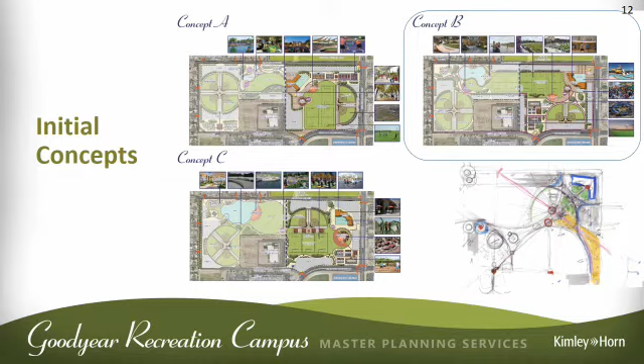From this concept development in Workshop 2 and the feedback we heard, Concept B started to rise up, but we also had other comments that helped us get to this final concept. As mentioned, the concentration is on the 40 acres on the east side. The west side, which is the remaining 46 acres, was very conceptual—we wanted to have ideas of how the interface could be with the current 40 acres.

Another element we're looking at is the half-street improvements. There will be half-street improvements along Harrison, along with a signal.

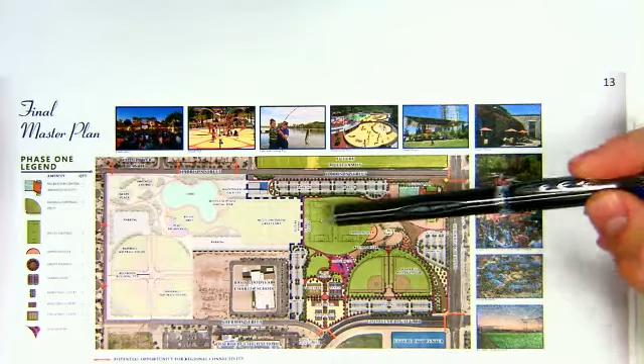Just want to quickly walk through some of those elements. We have the fields, which could be utilized as an event space as well. Again, one of the key aspects was trying to get multi-use out of the entire park as a whole. We have the recreation center building in orange. The blue is the aquatics facility. The multi-use plaza right here. The baseball fields, sport courts down here, the playground, and then a group ramada.

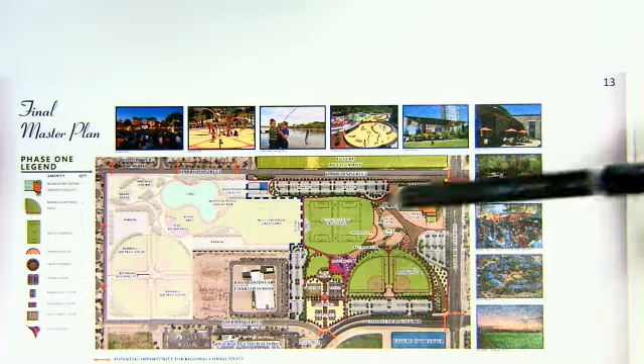One of the elements we heard about was distributed parking throughout, and then having an open park instead of having roads that do go through the park. So that was very key in terms of how we situated the parking.

When we looked at the multi-use plaza, one of the key elements was creating a space that could be very versatile to hold different events. We could have food trucks. We could have an art festival. We could have a farmers market. So we have an upper plaza that's near the building. We have a middle plaza, which is really that opportunity. We could have a drivable space that would serve as a fire lane as well. But that's where we could really have those food trucks come on in and have them accessible to the site.

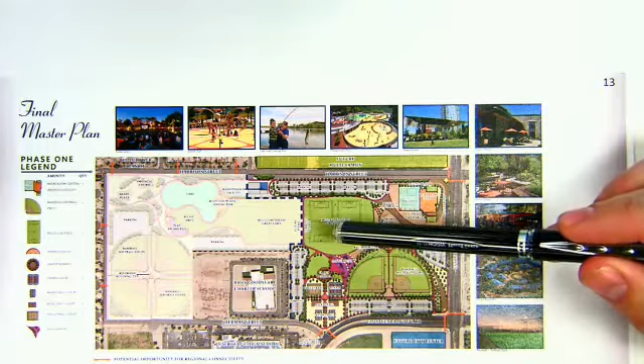And then we have this lower plaza, which really ties in with this orange half circle here, which is representing an amphitheater. Conventional amphitheaters don't get much use during the year, maybe 2-3 times for a large event. With this stage, the idea is to have the ability for larger performances that could hold folks on the event lawn, and then have intimate spaces, maybe music or performances for a smaller group in that multi-use plaza area as well.

So we'll definitely have different opportunities as we go through the site to play with the vertical, and we do look at opportunities to sink the fields to create more of an open upper area space, so you kind of have a crescendo. One of the elements as you come in from Goodyear and Estrella, as you come into this way, is the reveal. So we've looked at an art space that would be centrally located within the plaza area to kind of have all angles. When we did a charrette exercise, one of the key elements was trying to get line of sight from the building back to the park and throughout, so folks could have that exposure and have a new sense of discovery when they do come to this park each time.

I'm going to ask you to hold right now. This is a lot of information. Where he is at this part. Do you have any questions on that or on these, anything they showed? All right, good job then.

Go ahead. Where was the place where you could possibly have a music festival, that type of thing? Show me that again on here. So a larger event could be here. This would be the stage. That would be the stage, okay. Yep, and then this would be a larger venue for that.

Yeah, I thought what we had at the ballpark recently seemed to be pretty successful. We had about 5,000 people there. So with the whole idea, I like the gathering place approach. And with that approach, this would be perfect to draw people in for a variety of events throughout the whole park. So it's something that I think will get utilized, and you can come up with all kinds of creative ways to get them there. So again, I appreciate that part of it.

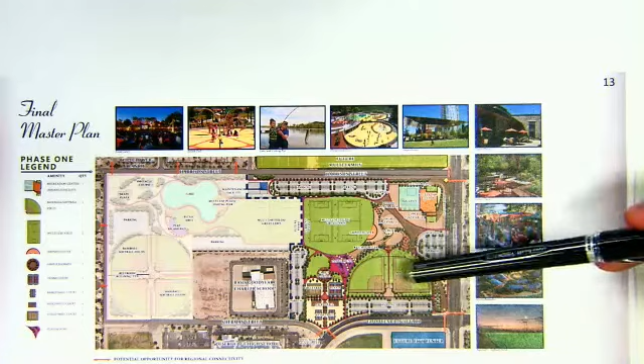So quickly, just to recap on some of those amenities: the 2 softball/baseball fields, 2 rectangular multi-purpose fields, the playground. We have 2 tennis courts, 2 sand volleyball courts, 6 pickleball courts, and 2 basketball courts.

Sure, back to the presentation.

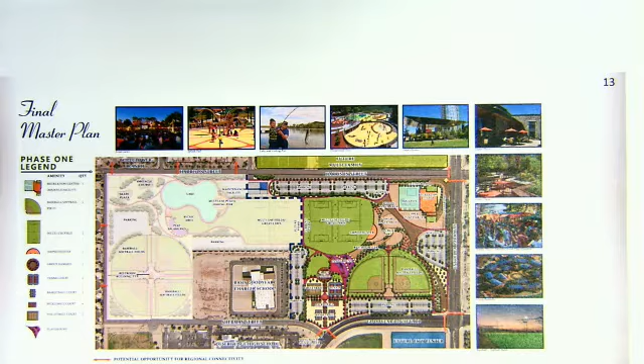So look at the recreation center. This was located at the northeast corner of Harrison and Estrella. This is a 30,000 square foot floor plan that we're looking at here. It includes a gym, multi-purpose gymnasium, multi-use classroom, multi-use rooms, 3 of those. It has the locker rooms.

As you come into the orange space, you can either go left, to the aquatics facility, or go right, into the recreation side, so the gym or the class multi-use rooms. The multi-use spaces would be versatile to allow for anything from bunko to maybe a Zumba class, a yoga, and then that larger multi-use space could be opened up to the activity lawn there, so it could have maybe a banquet, a covered patio space. The gymnasium would have roll-up doors, another activity space off to the north there to kind of spill out, have events there. As you move into the aquatics facility, you look at a competition pool, 8-lane, and then an activity pool, and then a lazy river and a slide.

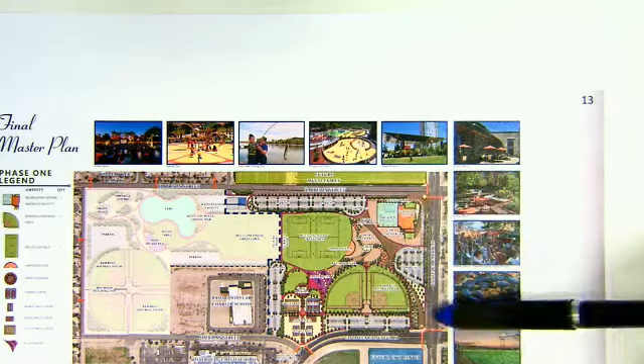So I was looking at the full thing here. Is there a path around the entire facility's new park? Can we switch to Elmo? Thank you. I see the access road and into the parking lot. So all the purple, that's a multi-use pathway that goes throughout, and it's one of the comments we had, that we certainly wanted to have that.

That could get you around and look at all the elements in the park, and then have a curvilinear element to it. What's the distance around the entire path? That's a great question, I can come back and get you that.

The only reason I asked is I was curious if one day we wanted to run a race, like a 5K fun race or something like that. It's probably about 4,000 to 5,000 linear feet of path throughout the whole park, kind of all around if you look at it. Okay, I'm just curious, thank you.

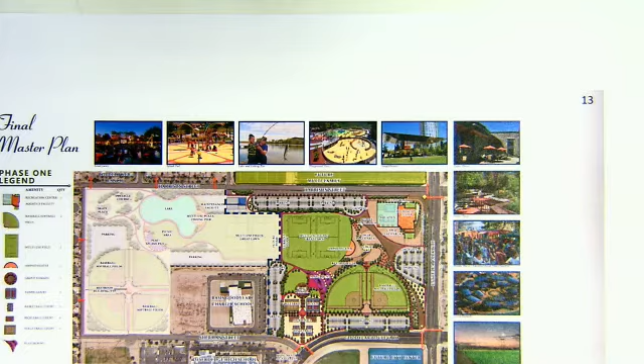Any other questions? Can we go back to the presentation? Sorry.

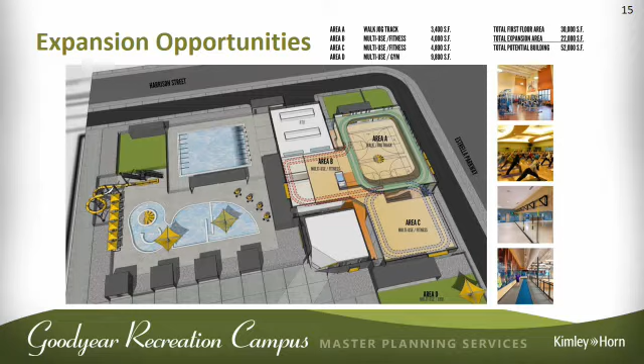So we have evaluated that. We visited nearly every facility in the city or area, and nearly every facility we visited that had a child center, they were repurposing that space and it wasn't being utilized. I think the popularity for that really depends on your program.

Okay, and so if we were doing something like a Lifetime Fitness, then there would be a need for people to come and use the child care services. I think it'll be something we keep in consideration as we look to expand, because those expanding areas may dictate the need for that type of amenity.

Good, thank you. But actually, at that age, you wouldn't want unaccompanied children; you want them accompanied by an adult. Yeah, and there's a lot more to the cost of something like that, the insurance and all of that, they'd have to pay for it. Yeah, so, not a bad idea, but when you see how many places the schools have during the summer, churches have it too, so there is some responsibility there. Go ahead.

Going back to some of the aquatic facilities areas, that activity area would include a zero depth pool where folks could just walk into that edge, which is really more of a splash element. Instead of an independent splash pad, it would be integrated into that activity area, along with the lazy river, a slide, and even the competition lap pool.

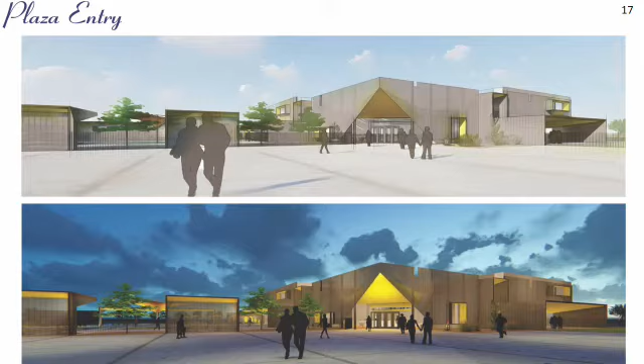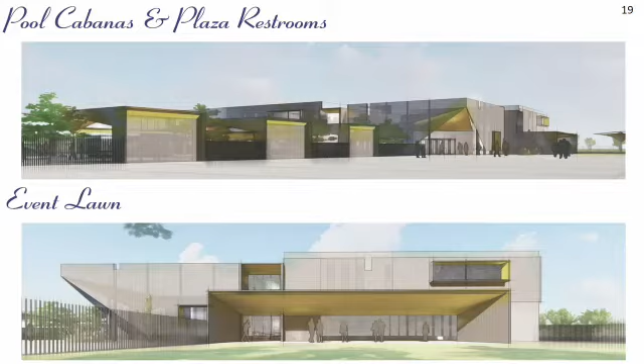So the top one gives you a look at this plaza area during the day, walking towards the recreation center, and the ones at night. This gives you an idea looking from the aquatic space back to the building. These two, the first one shows more of the aquatics facility with potentially some Ramada spaces as you move towards the recreation building. The bottom one shows that larger multi-use room and plaza that could be developed outside for a larger banquet, with event space on the lawn there.

So now we'd really want to show you an exciting video. It shows you how to experience the site, a little fly through, to give you a little flavor of the site. And then we'll move into next steps. Thank you.

There was no sound, but I think it still demonstrates the process. So, maybe.

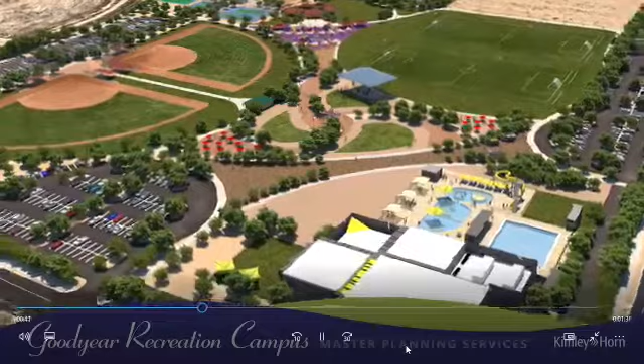That's a good thing, look at that. No, I don't think so. We could try. Oh gosh, that's gorgeous, really good one. Wow, this is a great way to... Oh man, isn't that beautiful? Gives you all that space. Wow, how exciting.

You can really see the plaza space from these shots. It's gorgeous, look at that.

That is a jewel in the desert. It is beautiful, wow.

The soccer community is going to be very happy with that, you know that. They've been asking for that for a long time. Look at the people running. Then the bottom, it's cute. There's the track, I think that was Councilmember Hampton doing his ninja training down there.